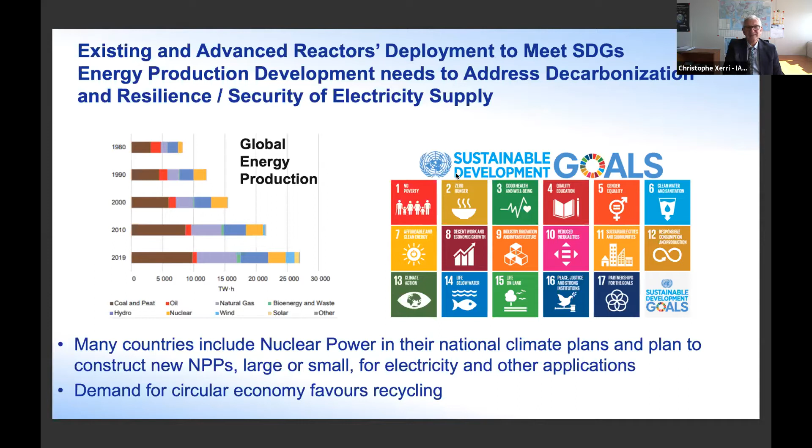So how do we foresee nuclear power beyond 2050? I said beyond 2050 because before that, basically all of us already know what is ongoing. If you take a long-term view, the current majority of reactors are based on designs developed in the 80s and 90s, which have been improved over time, with the leading technology currently being the light water reactor, whether pressurized, boiling, or VVER.

There are also other technologies being implemented, like the Canadian CANDU reactors, for instance, but light water reactors are clearly dominating the scene, with sizes that started at 400 to 600 in the 70s, now being close to 1,000 up to 1,500.

Future systems are coming, and what we see is, of course, still a good contribution from light water reactor technologies, including big reactors, which are here to stay. But in addition, we see SMRs, small and modular reactors, coming with specific designs, sometimes similar to light water reactors, but sometimes very different. We expect that with nuclear energy here to stay, recycling will become more widespread, which means fast reactors will also have their role to play.

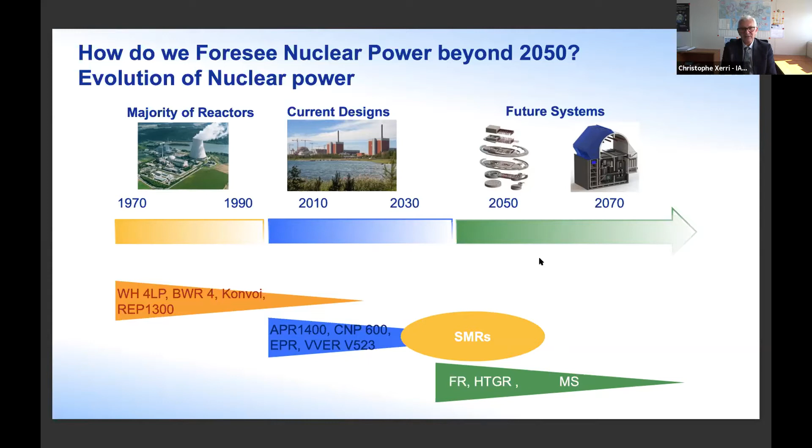Which means that because implementation of a nuclear power program takes many decades—and here we were discussing the design—but once you've got it, your reactor will usually run for 60 to 80 years, maybe even more in the future. There are many pathways and many unknowns, so we'll not go into details, but just give you a glimpse.

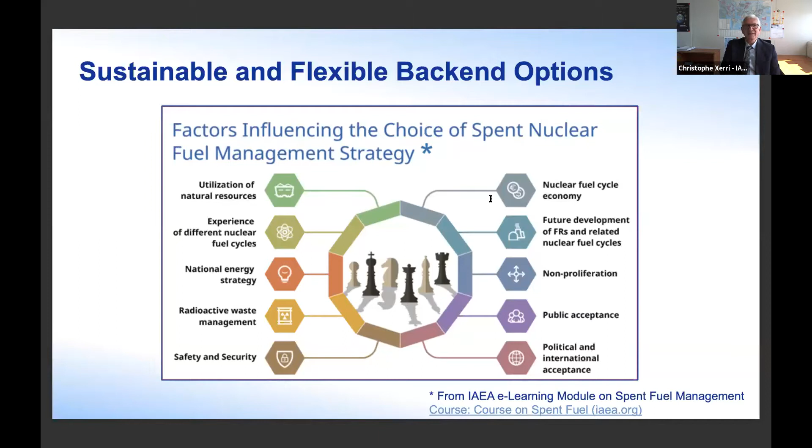And with Gen 4 reactors, we could go to a fully closed cycle. And if you take a very long-term view, maybe at some point we will be able to no longer use any uranium and run mainly on recycling of current and future spent fuel. All that with thinking of economic viability and safety, environmental friendliness and waste burden minimization, proliferation resistance, and flexibility to adapt to any policy evolutions.

So as you can see, the pathways are many, and it's very difficult today to know what the real situation will be in 10, 30, 40, or 50 years' time. Next one, please.

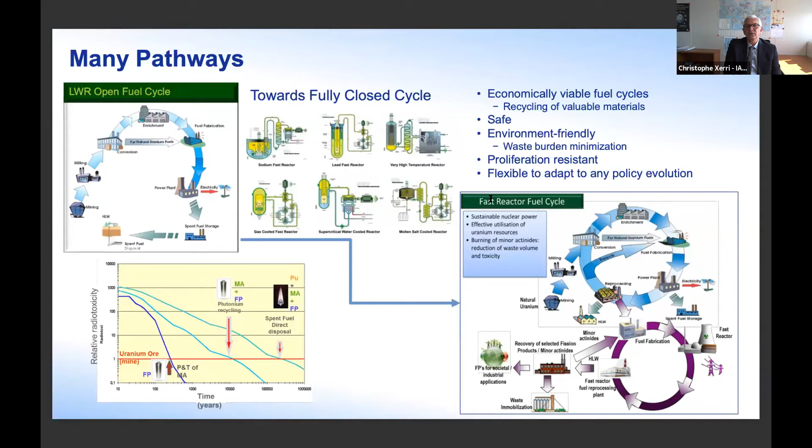Which means as well many unknowns. So on the storage itself and the technologies, location and duration, we started with 40, 50 years in mind. We are now close to 100, and it may be more. What the endpoint will be: direct disposal, recycling, which type of recycling, mono-recycling, multi-recycling, evolution of nuclear energy demand.

Today we saw that growing, but growing moderately compared to the needs of the planet. Maybe there will be a strong acceleration because there will be no other options, or maybe there will be a big breakthrough in nuclear fusion, and it will be a different way of thinking, and new technologies, which all will result in impact on spent nuclear fuel management in the future. So again, nobody knows, but it is important that these uncertainties, but also these opportunities, are identified, recognized, and addressed.

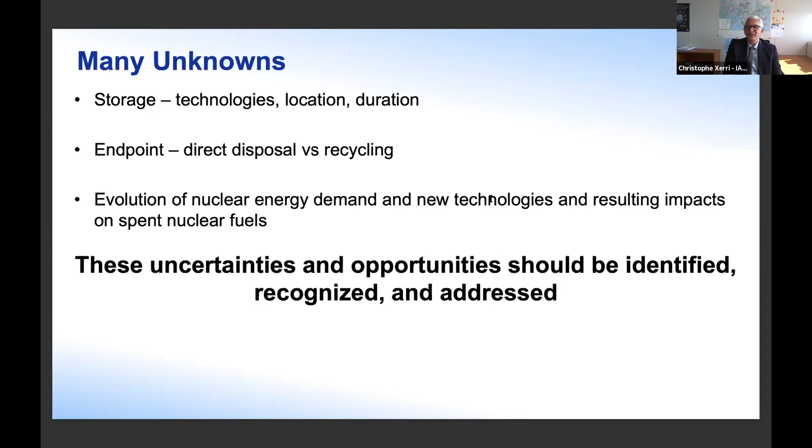I'm talking about opportunities, just quoting a side discussion I had some years ago with a country which is currently storing its spent fuel and was looking at several pathways for their future strategy. And one of them is, shall I take over the spent fuel of other countries? Because in 40 years' time, everybody will want spent nuclear fuel for fast reactors and I will be very rich at that time. So it's also an opportunity. Next one, please.

So in any case, storage is a key step of spent fuel management strategies. As you will see from Finland, between considering final disposal and having it implemented, it takes decades. Same with recycling. Some countries are basically recycling nearly just in time. But if you have not started to recycle, it will also take time.

And if you are waiting for opportunities to do that, the time you need to have either your geological disposal or your industrial recycling facilities, with the current economics of uranium, we are talking about decades. So whatever you think you will do, or whatever you want to do now, you will need spent nuclear fuel storage solutions. Next one, please.

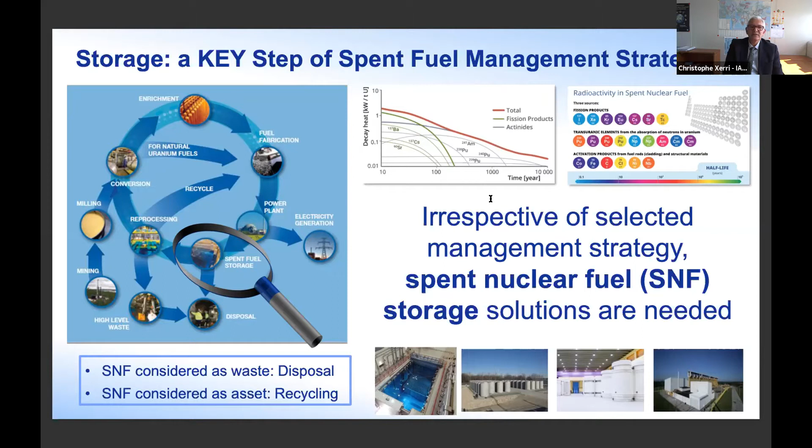So that's where we look at duration. Clearly, long-term storage is not an alternative to recycling or disposal. It's an interim solution. And I put here the definition we find in the safety glossary. Storage is a temporary step by definition: spent fuel is held in a facility that provides for its containment with the intention of retrieval, whether it is for disposal or for recycling.

But it does provide flexibility: new technologies, new recycling options, socio-political demands, which, as we said, could change in the future, public support. Now, recognizing that storage duration is an opportunity or something that you have to deal with, there are some topics to be addressed. One is the spent fuel behavior and integrity in long-term storage. Another one is the aging and maintenance of the storage facilities themselves. And another one, as an example, is spent fuel transportability after storage. Next one, please.

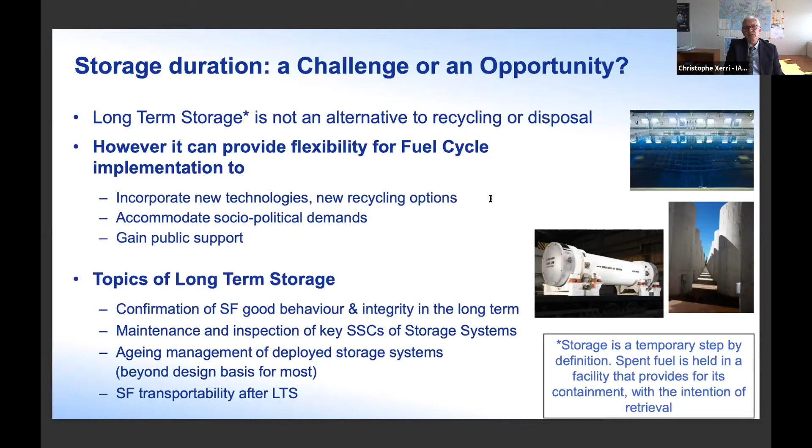So the agency has coordinated a lot of work on all these topics. Here you see a series of what we call coordinated research projects on the behavior of spent fuel assemblies during storage. And we have consolidated the results obtained since 1981 in a new TECDOC, which is being published. Next one, please.

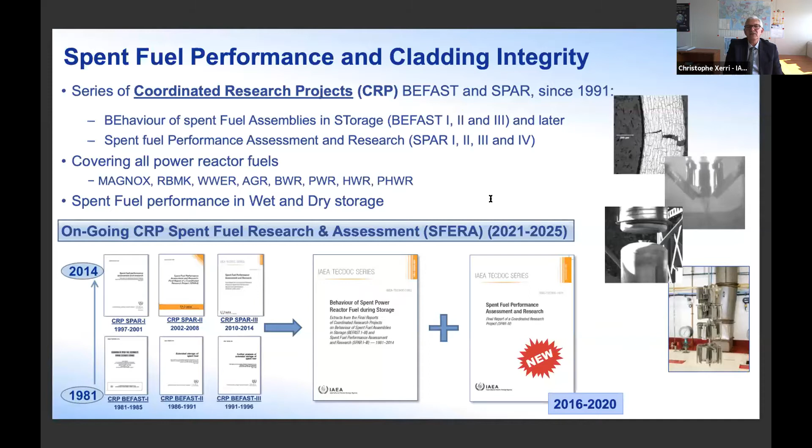We have worked on spent fuel performance and cladding integrity. And as you can see, this work is very detailed, based on more than 60 years of storage experience in wet conditions, mainly at reactors but also sometimes at centralized facilities, and the more recent, but still more than 40 years, experience in dry storage. And one of the topics looked at here was the effect of hydrogen on zirconium cladding. Next one, please.

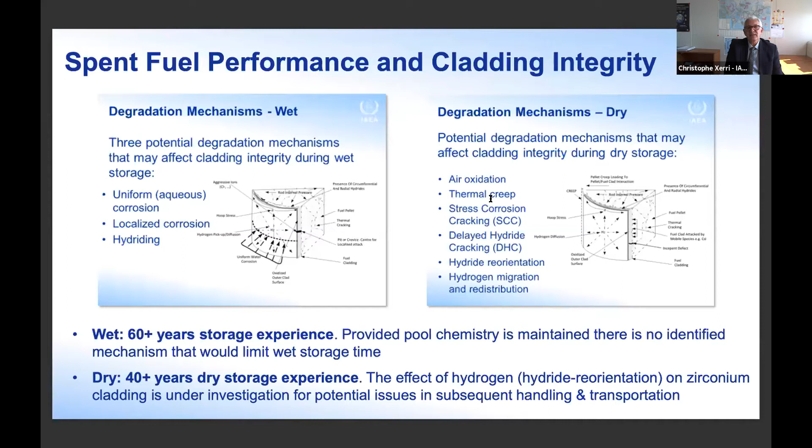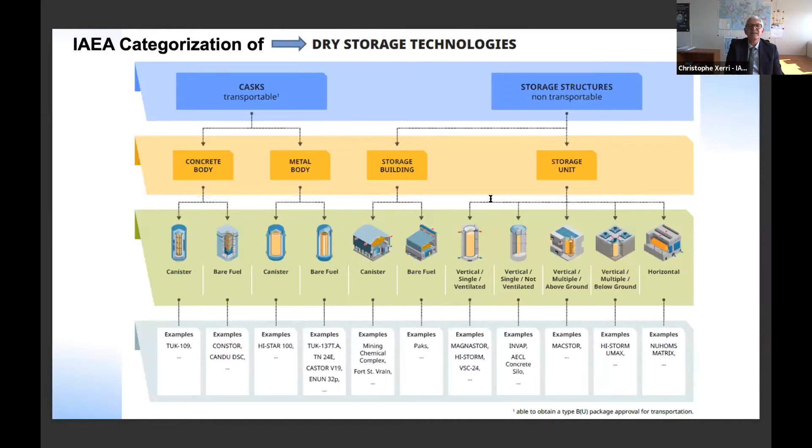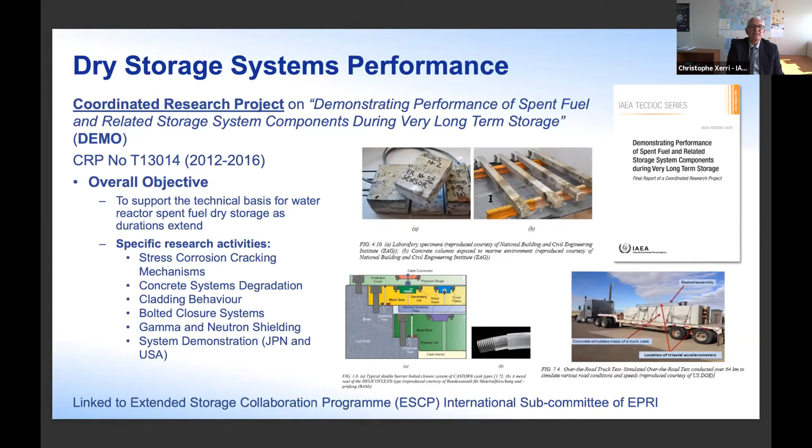So we are working also on dry storage systems performance with a coordinated research project on demonstrating performance of spent fuel, which we called DEMO, which is coming to an end. And we will have, next one, please, a new one coming. Yes, on aging management programs for dry storage systems, which also came to an end, and we are publishing a TECDOC, technical documentation, on it, and we are starting a new CRP on spent fuel storage systems, which will be launched next year. Next one, please.

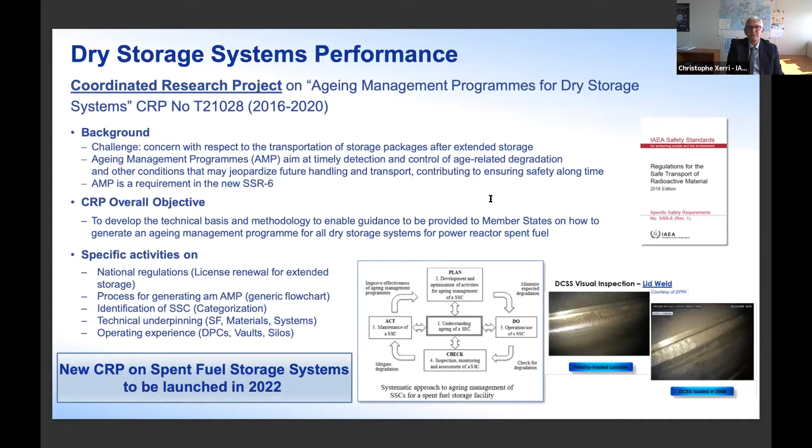And on spent fuel characterization, which is important, especially when we're talking about long lead times. If you are not exactly sure of what you will do next, you need to have the proper information to transfer to the next generation. And on that also, we are launching a new CRP on options to enhance nuclear energy sustainability, going beyond the characterization itself. That will be launched also next year.

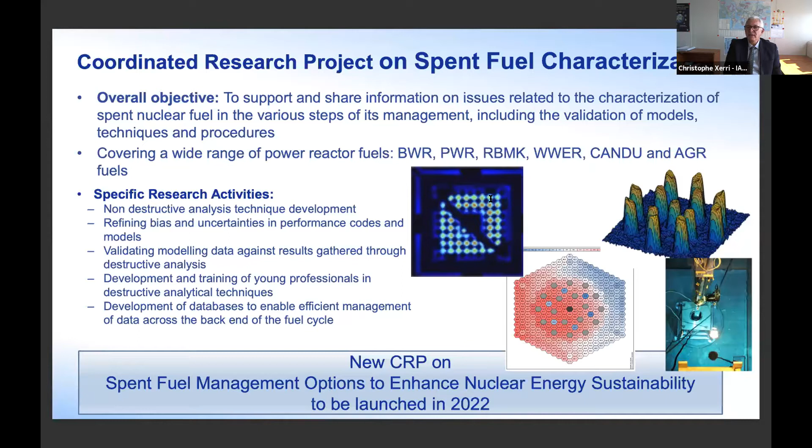All these coordinated research programs will be announced on the agency website, and all organizations in the world can decide to join us in this joint research effort. Next.

Apart from that, we have other collaborative projects which are looking at spent fuel under INPRO, the Innovative Nuclear Reactors and Fuel Cycles cooperative approach to the back end of the nuclear fuel cycle, looking at the drivers, whether there are institutional, economic, and legal opportunities and impediments, and so on, a publication working on that, and also waste from innovative types of reactors and fuel cycles.

It's important when we are developing new technologies that we think about the spent fuel management of this new technology. Chromium cladding will not behave and be handled the same way as the current zirconium cladding, for instance. And when we're talking about molten salt reactors, it's a whole new field which needs to be discussed and researched. Next one, please.

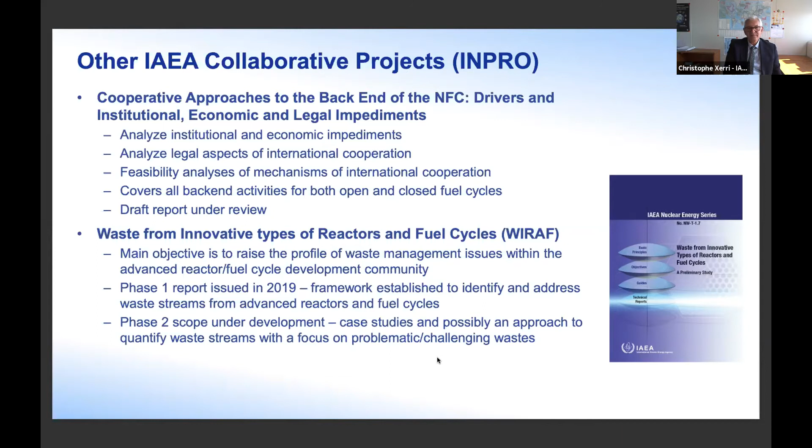So basically, as a conclusion, ensuring flexibility provides opportunities for any anticipated or innovative future solution. Storage for long periods contributes to flexibility, and we have already done a lot of research which gives us a good level of confidence in the safety and sustainability of extended periods when necessary. As I said again, some countries are recycling just in time and are happy with it.

And flexibility should not be seen as wait and see. Wait and see is something like I do nothing and I think of nothing. That is not sustainable and that is not a good policy. Now, having a policy that you reassess from time to time and remaining flexible in terms of adapting to what the new realities will be is a proactive and a very positive approach.

And that's what we're encouraging those countries, especially those countries who are starting nuclear programs now, to have a proactive approach on spent fuel management and to reassess their policy on a regular basis, so that they can adjust to the new technologies and the new social expectations at that time, and in between benefit from the 60 years and more of experience on spent fuel storage, plus all the research done, which gives confidence that it is safe to do so.

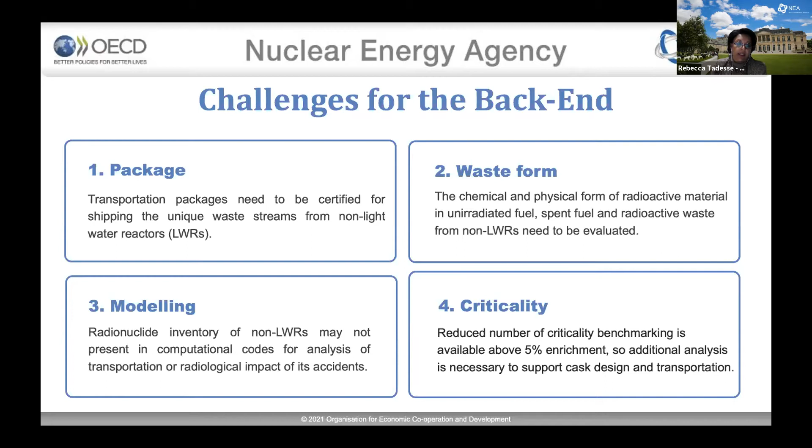And criticality is also an area we need to address. When we're looking at high enriched uranium as one of the elements we might use for advanced reactors, we need to make sure we have the data necessary to do benchmarking above 5%, and that the casks for transportation as well as spent fuel storage are capable of addressing criticality concerns. Next slide, please.

What are the anticipated regulatory challenges? Some of the things we've identified: for enrichment and fabrication facilities, most commercial facilities are designed and licensed for 5% enriched material. So there's a challenge that the regulator has to consider how to increase that, and the licensing process needs to be evaluated.

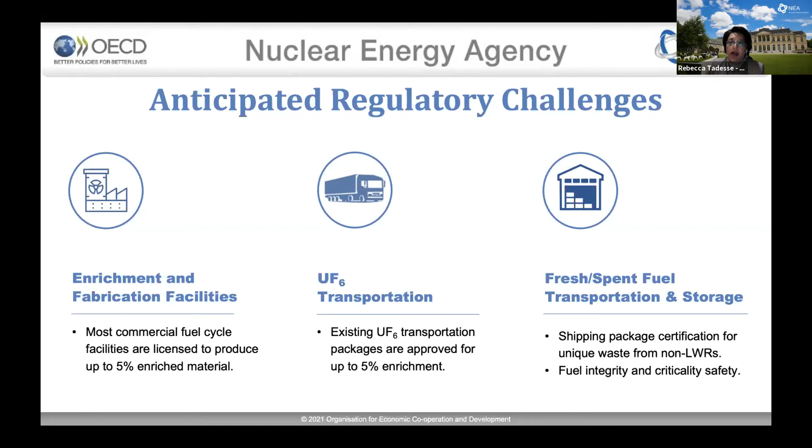Transportation is also an area that needs to be addressed from packaging when you're looking at high enriched, or when you're considering exotic materials. The fuels being considered for molten salt reactors and other reactors need to be evaluated to make sure the transportation packaging is still within the bounds. And for fresh and spent fuel transportation and storage, as I said before, we need to address issues with criticality, integrity of the fuel, and safety. Next slide, please.

What the Radioactive Waste Management Committee is doing is that we created an ad hoc group on extended storage of radioactive waste and spent fuel. The objective of this ad hoc group is to look at current activities, and whether there are any gaps that need to be addressed to deal with new types of spent fuel generated through high burnup, other management issues in new fuels, aging issues, and transportation readiness for both fresh and used fuel in the future.

We also looked at consideration of existing codes and standards to predict radioactive waste and spent fuel evolution for long-term storage, identifying tools required for extended storage periods, and any transportation issues in radioactive waste and spent fuel. This ad hoc group was given the responsibility to look at the gaps for 1 year, and then it goes back to the committee to determine what further activities will take place. Next slide, please.

We also thought it's important to consider the role of waste management and decommissioning in advanced reactor design and licensing, as well as fuel. So we are planning an NEA and NRCan workshop in Ontario, Canada. The dates have not been determined yet due to COVID. This is really to bring the designers, operators, implementers, and waste people together to understand the issues to be addressed from the design perspective for radioactive waste management and decommissioning, so that we take the lessons learned from existing sites and activities, learn from them and improve them.

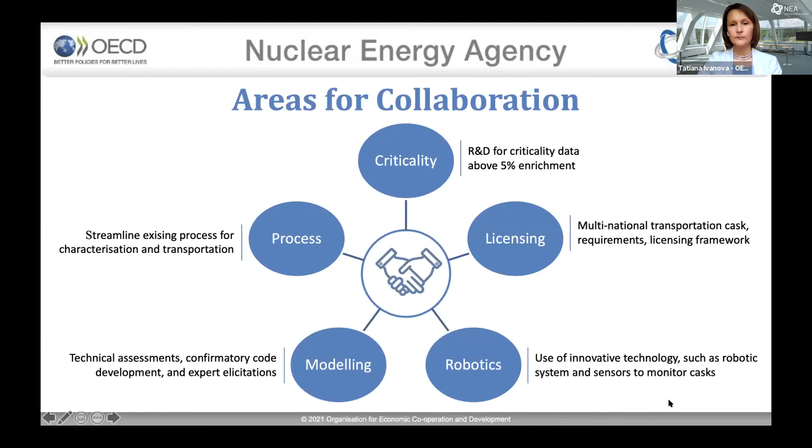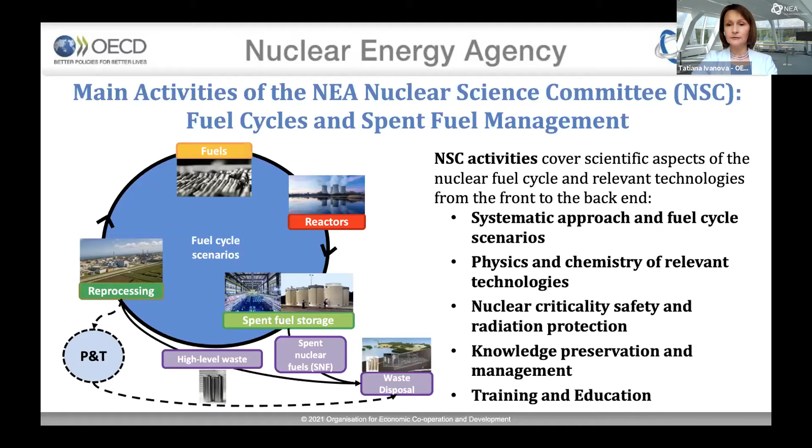Some of the NEA initiatives that Rebecca has already mentioned, I'll briefly present now, and I would like you to change the slide, please.

The fuel cycle scenarios is one of the activities under the umbrella of the Nuclear Science Committee. A recent initiative, a task force on demonstration of fuel cycle closure, including partitioning and transmutation for industrial readiness by 2050, was launched in January this year.

This initiative brings together high-level experts from several countries who meet regularly to produce high-level reports that will tackle technological, economic, and societal aspects of advanced fuel cycle and partitioning transmutation options.

This report will provide recommendations on how these technologies can reach industrial maturity by 2050, and it will also recommend practical steps towards experimental demonstration of the feasibility of the closure of the fuel cycle.

Also, I'm very pleased to announce here that the NEA, jointly with our members, is going to co-organize the International Exchange Meeting on actinide and fission product partitioning and transmutation.

The next event, the 16th IEMPT, co-organized by Rosatom, will be held in June next year in St. Petersburg. We thank our Rosatom partners and invite you to attend this meeting and be part of the discussion on state-of-the-art developments in this area.

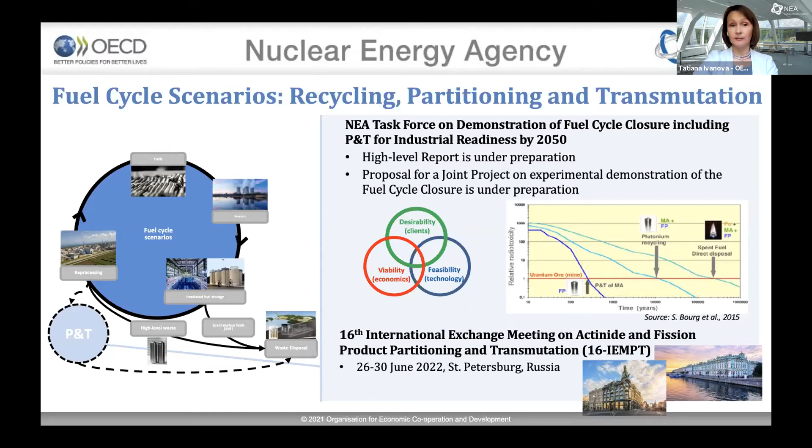Next, another topic I would like to present is the separation processes relevant for spent fuel, nuclear fuel reprocessing, waste treatment, recycling, and reuse of spent fuel components.

Current activities in this area encompass a report on treatment of volatile fission products and a new database on extractants for spent fuel reprocessing. You can also see the publications that have been produced by our group in this area. Next slide, please.

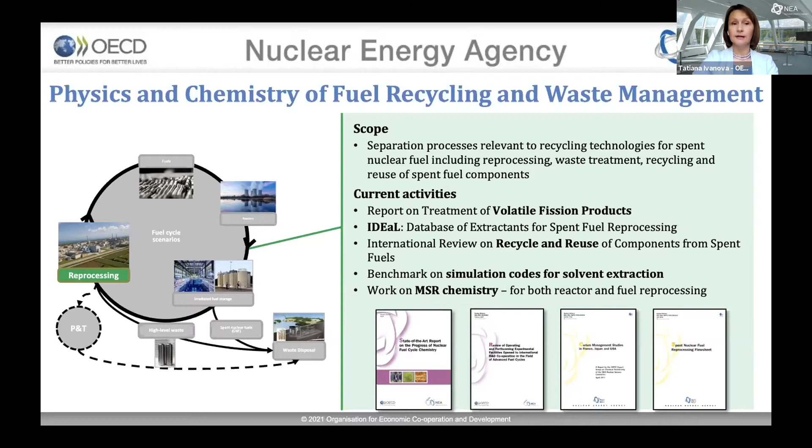And of course, nuclear science tackles fundamental aspects related to radioactive waste management and storage. Starting from fundamental aspects, we have a collection of thermodynamic models and data, along with joint projects and regular nuclear science activities.

We have a broad range of nuclear data topics covered by our working parties and expert groups. We also work on nuclear criticality safety, where our work includes modeling and simulation, benchmarking, validation, and uncertainty quantification.

One of the major outputs in this area of nuclear science is the Handbook of the International Criticality Safety Benchmark Evaluation Project, or ICSBEP project.

This is the world's largest collection of internationally peer-reviewed critical benchmarks that are widely used for criticality safety assessment of fuel cycle facilities, including transport and storage.

Currently, the database contains over 5,000 benchmarks of critical, near-critical, or subcritical configurations collected since 1995.

There are several configurations with over 5% enrichment, as mentioned by Rebecca and required by our practitioners.

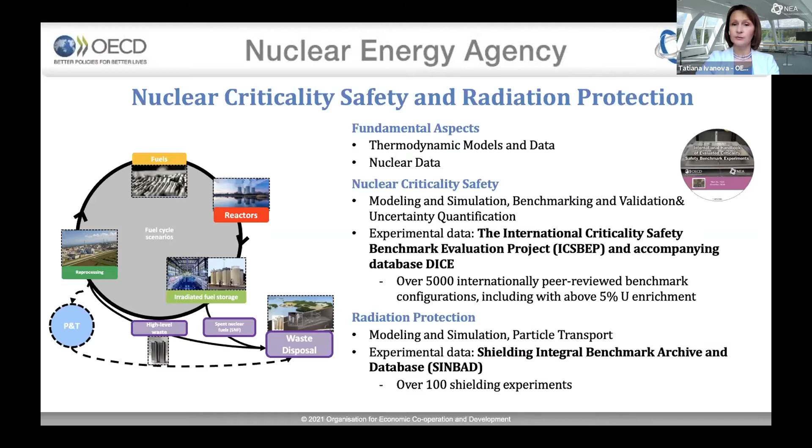It is compiling high-quality experiments for validation and benchmarking of computer codes and nuclear data used for radiation transport and shielding problems. Next slide.

Thank you. Another very important area, also mentioned by Rebecca, is characterization of spent nuclear fuel. We have a spent fuel isotopic composition database, so-called SF-COMPO, that contains the world's largest collection of experimental assays of spent nuclear fuels.

The measurements in SF-COMPO are isotopic concentrations from destructive radiochemical analysis of spent nuclear fuel samples.

These are supplemented with design information of the fuel assembly and fuel rods, as well as relevant information on operating conditions and characteristics of host reactors.

The data in SF-COMPO comes from 750 spent nuclear fuel samples irradiated in 44 power reactors, which have been experimentally measured in the past 50 years.

In addition to this, we have recently launched a new benchmark on calorimetric measurements of spent nuclear fuel assemblies, and we are working on this together with a Radioactive Waste Management Committee.

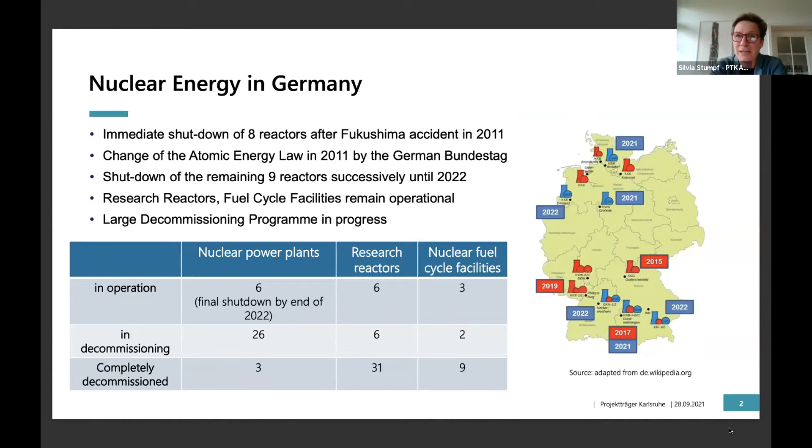So what is the situation in Germany? On the basis of the working results of the German Repository Commission, it was decided to have an amendment of the Site Selection Act. So it was defined that one has to define new exclusion criteria, new minimum requirements, and weighing criteria. This new Site Selection Act came into force in 2014.

In connection with this Site Selection Act, there was a restructuring of responsibilities, the political responsibility and the implementing responsibility in Germany. And what is even more important, Germany went back to a blank map. So there was a reset and a start from zero when it comes to finding the right site in Germany. We have a blank geographic map at the moment.

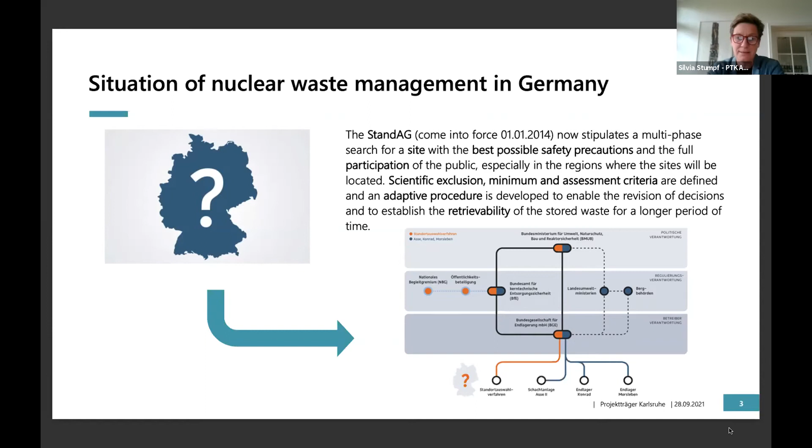In order to select the right site, it was decided to have a three-step selection process. In step one, which is what we are in right now, that is the determination of sub-areas. The first interim report with proposed areas was already published at the end of last year, 2020. On the basis of this interim report, the Bundestag will decide on the regions to be explored in steps 2 and 3: step 2 being the surface exploration, step 3 the underground exploration, and the whole exploration process will end in 2031.

With this, Germany is going to start the construction of the repository until 2050, and with this, also the implementation as of 2050. And of course, this will have an influence on our interim storage, since the timetable is much enlarged. Next slide, please.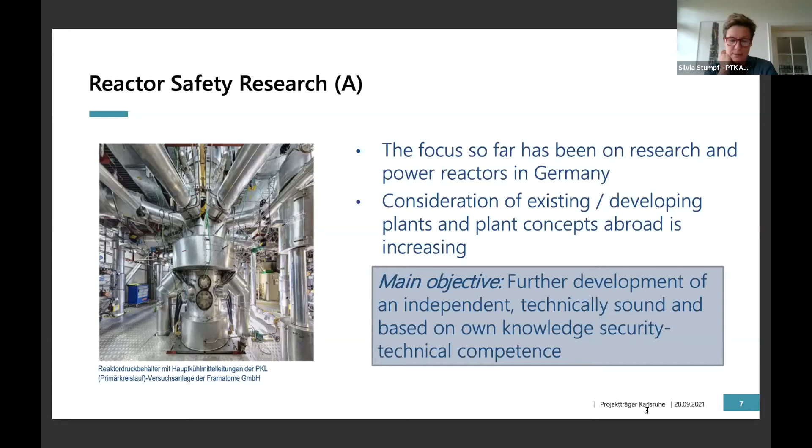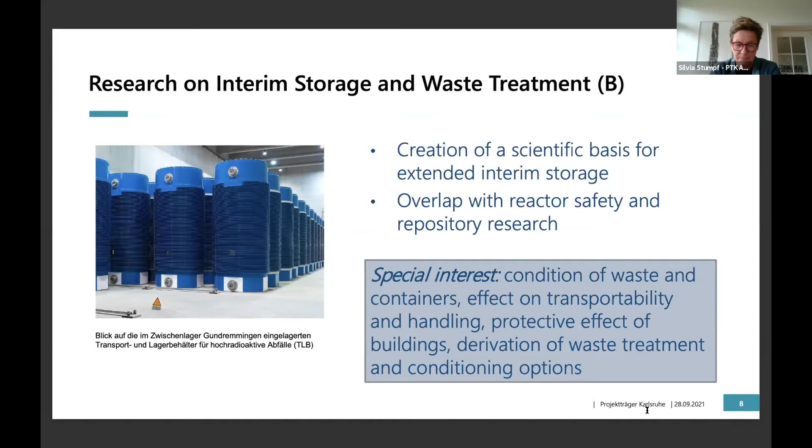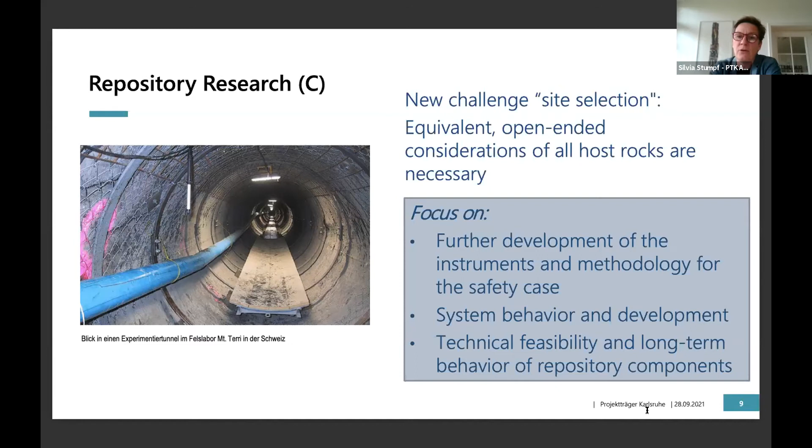Repository research, in the context of the new challenge of site selection, requires an equivalent open-ended consideration of all host rocks, such as salt, crystalline, and clay, since we start from a white map again. The focus is on the development of instruments and methodology for the safety case, system behavior and development, and the technical feasibility and long-term behavior of repository components.

When we talk about the future of spent fuel management, one perspective to look at is the perspective of research. This research approach is divided into three main pillars: first, applied fundamental research, classical experimental work in laboratories and modeling of experimental data. But we are also performing practical validation and application, so safety assessment and technical demonstration, working in underground research labs. As a third pillar, you have education and training in order to build and maintain technical and scientific expertise.

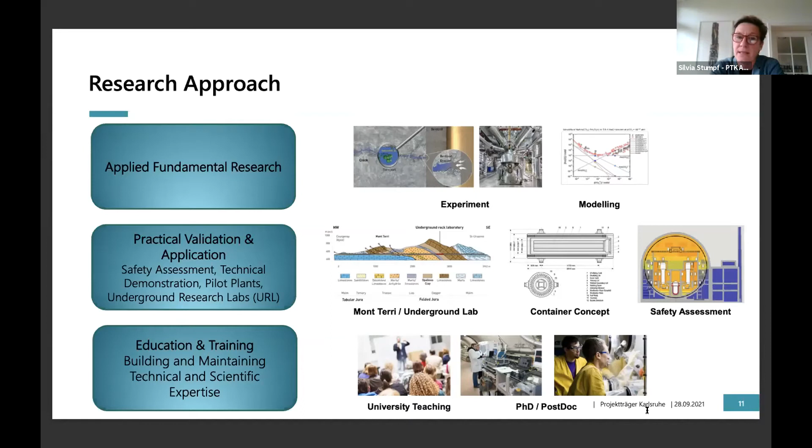Beside the perspective of research, one could also change the perspective and look at the management idea by developing competence in young academics. It's very important to have qualified staff to perform research for reactor safety and interim storage, etc. But moreover, it's very important to have the preservation and expansion of specialists' knowledge. So knowledge management is also something very important, which we definitely realize in Germany.

I guess Mrs. Ivanova was also talking about that, and I personally see a great overlap, that knowledge management, training, education, and basic knowledge in physics and chemistry is something Germany is also aware of in order to have a future in spent fuel management. But beside that, international networking is of overarching importance.

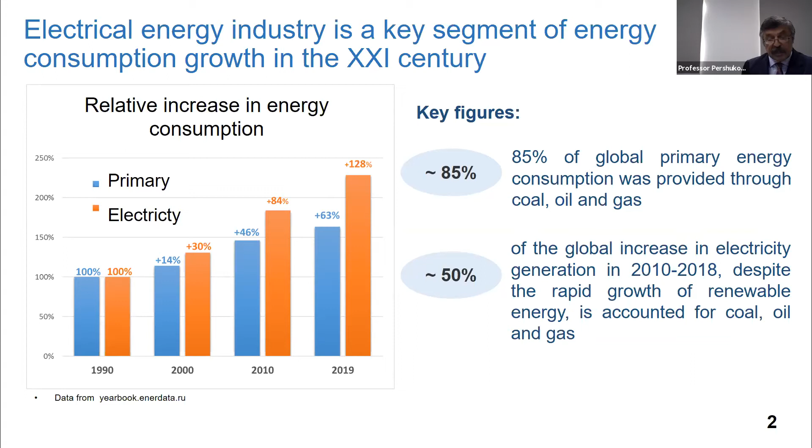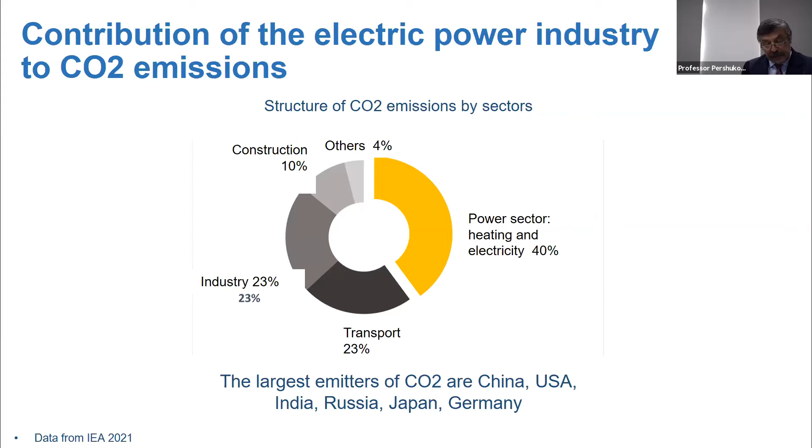About CO2 emissions and decarbonization. According to the latest data from the International Energy Agency, the electricity and heating sector accounts for approximately 40% of carbon dioxide emissions. The task of decarbonizing this sector of the economy is key to the global agenda for climate regulation and sustainable development. Russia is one of the largest emitters of carbon dioxide, ranking fourth after China, the United States, and India. In the address to the Federal Assembly in April this year, our president announced that we must respond to the challenges of climate change, outlining the target points.

The general structure of power generation: Germany has actively developed renewable energy. This led to an increase in the cost of electricity and made production dependent on weather conditions, but the problem of emissions has not yet been solved. France generates 70% of its power from nuclear, and the price of electricity is approximately two times cheaper than in Germany. In Russia, we now have 19% nuclear power generation across the whole territory, and approximately 40% if we're talking about the European part of the Russian Federation. Our price is only 5 euro cents per kilowatt hour. These factors should be accounted for when preparing responses to the challenges of climate change.

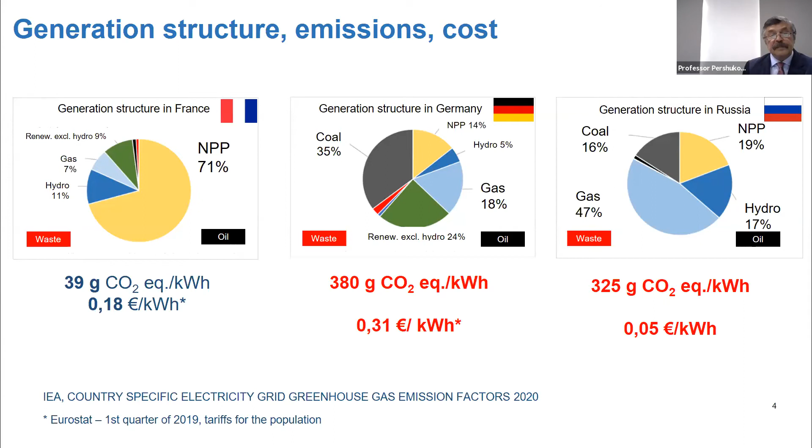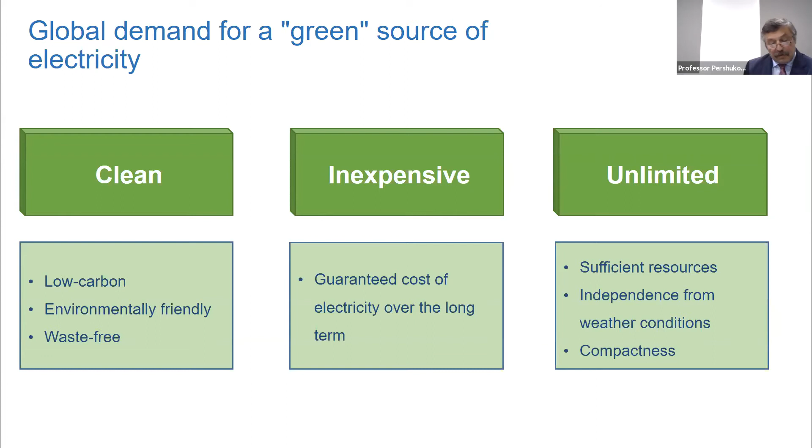What does it mean for us, for our understanding, to have a green source of electricity? The global demand for a green source of electricity can be briefly described in three words: clean, inexpensive, and unlimited. Of course, I'm not talking about safety, because for nuclear power, safety is the foundation. We can't discuss any technical solution unless it can provide a very, very low probability of accidents.

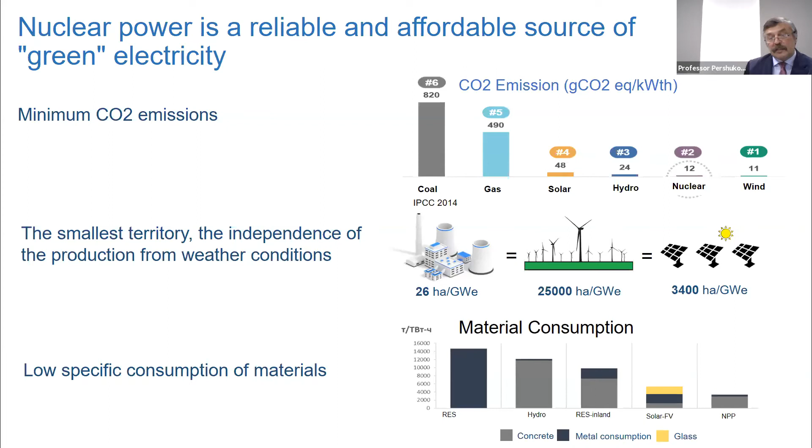We've discussed a lot about the general characteristics of nuclear power and how we see it on the global maps of power generation. At minimum CO2 emissions, nuclear is in 2nd place among all types of power generation technology. Second, it uses the smallest territory and depends less on production from weather conditions—there's a comparison of nuclear energy with wind and solar. We also make comparisons with low specific consumption of materials, and we see that NPPs, due to their very high energy potential in a small volume, also have very good material consumption characteristics during construction.

Nuclear power achieves full compliance with the requirements for a clean, inexpensive, and unlimited source of electricity only when moving to a closed nuclear fuel cycle, which solves the issues of sufficiency of resources, near zero waste, and absolute environmental safety. This position is a basic principle when we consider the breakthrough project, and we try to input these basic principles in the realization of our project.

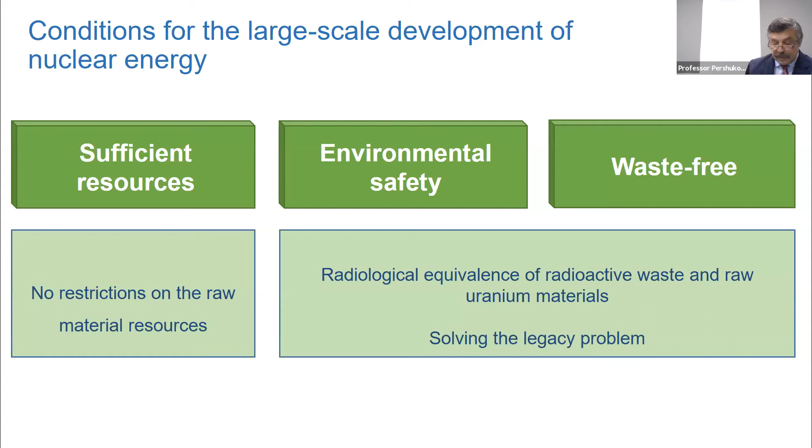In raw material terms, you know that open cycle uses only 0.7% of uranium resources involved in power generation. In closed cycle, it will be 86%. The closed fuel cycle introduction of such technology increases the efficiency of the use of natural uranium by 150 times, where the share of world energy resources increases by 86%.

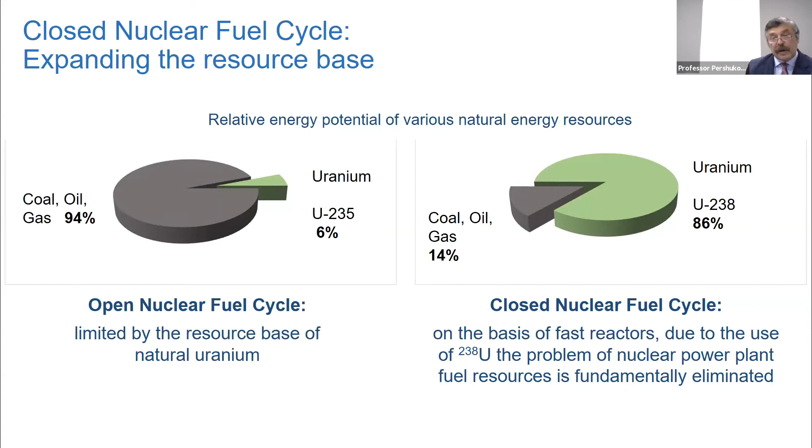Second, the biggest problem of open fuel cycle and waste management in nuclear power generation as a whole is the problem of radiological equivalence and radiation equivalence. If we are working in open nuclear fuel cycle, it will be near 700,000 years. If we are working in closed nuclear fuel cycle, it's just 100 years.

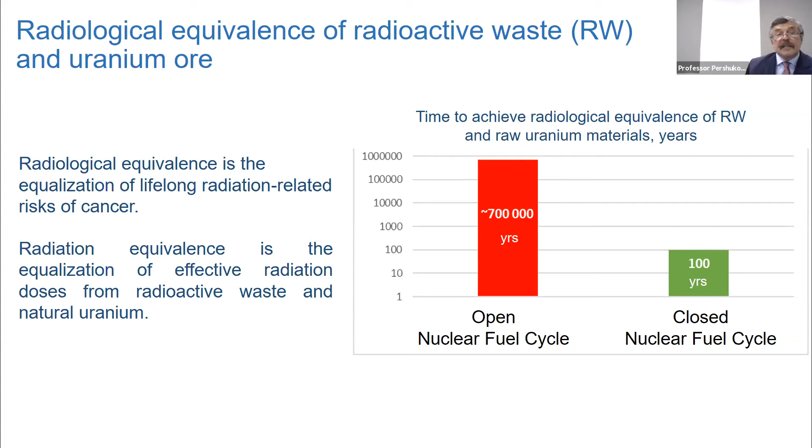Can we solve the problem of nuclear power and spent fuel if we are working in open nuclear fuel cycle? Unfortunately not. During the period from 2015 to 2040, we will twice increase spent nuclear fuel accumulation. It means that without a decision on reduction of storage of spent nuclear fuel, it's impossible to include nuclear power plants in green energy.

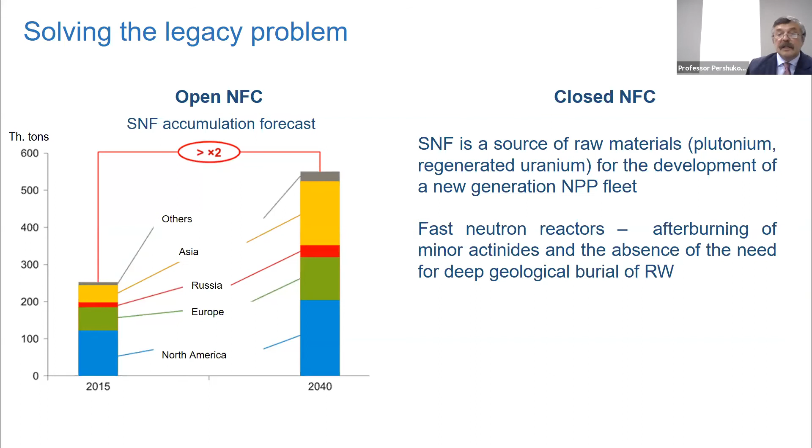What's the way? What do we need to do? Of course, there was a lot of discussion, not now but maybe 50 years ago, about the closed nuclear fuel cycle, with clear understanding that it's a way not only for green energy, but also for human health and social problems. But when we create the breakthrough project, the general idea is a closed nuclear cycle combined with the fast reactor, because without the fast reactor it's impossible to close the fuel cycle. This project included the use of the fast reactor for reproduction of the fuel base and ecological safety.

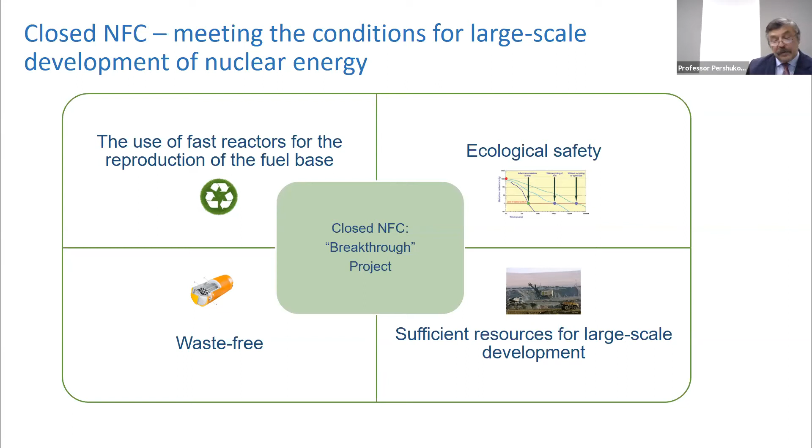This picture we see in each presentation. It's very good - waste-free, in general. Of course, we have some problem with natural radioactivity that we input into the fuel cycle from the land during the production of uranium. And sufficient resources for large-scale development - it's the basic principle that we input into the breakthrough project, and now we are realizing it.

This project will start approximately in 2011, 2012. From 2015, we start construction of the first plant or first model of this pilot demonstration energy complex. Now we are constructing it in the Tomsk region, and it's the fabrication facility.

In 2024, we will start manufacturing assemblies for primary loading in the BREST reactors.

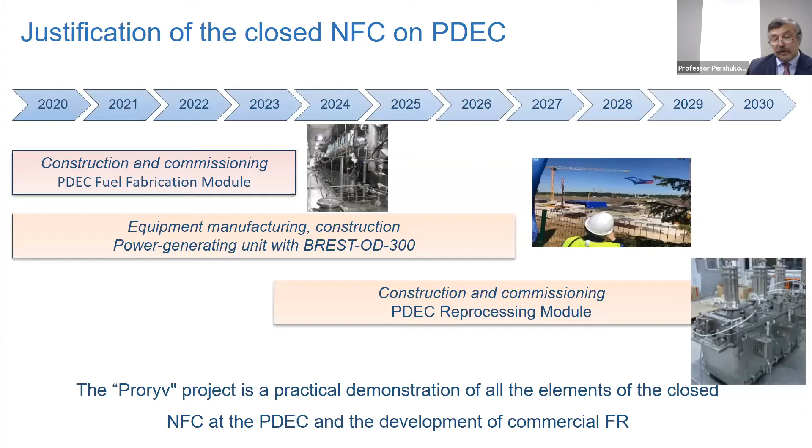We start construction in 2024, I hope, and need to complete before 2029. After that, the first irradiated pellets will be loaded into the reprocessing module, and we close the fuel cycle. By 2030, we complete construction of the pilot demonstration energy complex, and after that we will have proven technology for future commercial use.

Why? Where will we do it? Of course, we are going to understand that now from the simple process of changing the old generation, old light water reactors. After decommissioning, we need to construct some new ones, and we chose to consider using fast reactors for replacement in some power plants where reactors like VVER or RBMK must be decommissioned.

In 2045, we hope to construct a few commercial scale power units, and we will use a new technological platform. It means fast reactors or some special design like VVER-S for light water reactors with the possibility to use MOX fuel to produce electricity. By 2045, it's possible to ensure the large-scale introduction of fast neutron reactors with the closed nuclear fuel cycle, and the formation of a two-component nuclear power system in Russia will be completed.

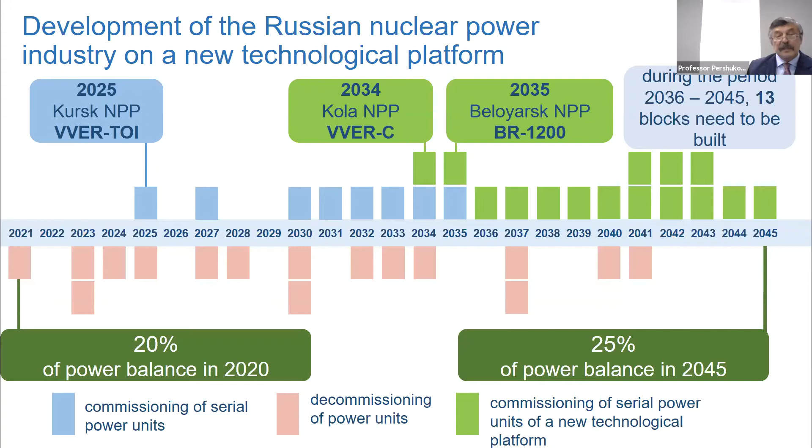Next, a few words. We are sure that the closed nuclear fuel cycle is the non-alternative way to bring the nuclear power sector into green energy generation. And also it will be a new technological platform, and this is a contribution to economic growth and improving well-being in Russian cities.

And so a few words: Breakthrough has come from a theoretical project, from an R&D project, to a really industrial scale project for demonstration of technology and science, under construction and operation, using the closed nuclear fuel cycle with fast reactors for the future. And so I hope before 2030 we can demonstrate the closed nuclear fuel cycle, with green energy status for nuclear power. Thank you very much.

Thank you, Mr. Pershukov, for this overview presentation of the Breakthrough, or Proryv, project. Now we look at another project presentation from another country. We will look at China, where we will hear from Dr. Liu Qiuchan. Liu Qiuchan is Director of the Division of Nuclear and Radiation at China National Nuclear Corporation. He will discuss China's nuclear power development and the significance of the back-end on that development, in the context of China's carbon peak and carbon neutrality goal. So, hello, Liu. The floor is yours.

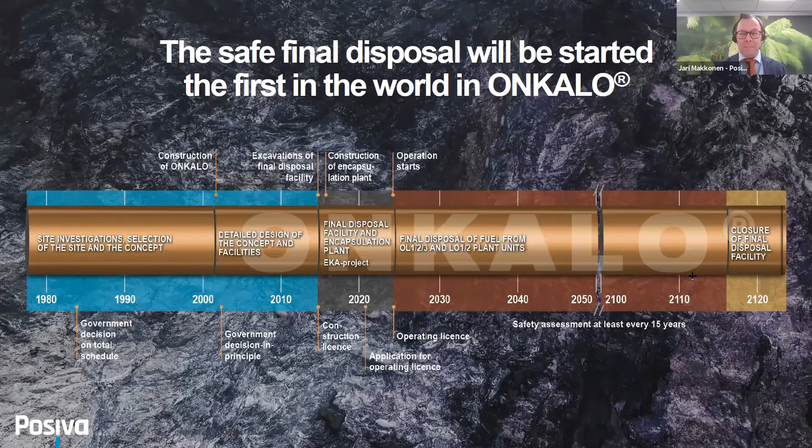But also, it's not only to complete a gigantic project from the Finnish perspective, but also for the entire world to communicate what we have been doing and how we have been doing this, what are our lessons learned, and what are the benefits that we can share for all the other nations who are using

nuclear energy. So during our years when we have been planning and constructing the facility, the important stakeholders have naturally been, of course, the government, which still changes every now and then, but still in the Finnish case, we have been very successful to keep this program alive all the time, even though the governments have been changing several times during the past 40 years. But still, there has been the commitment, regardless of every government in force, that we will continue with this program. It's so promising, and that's a very important thing.

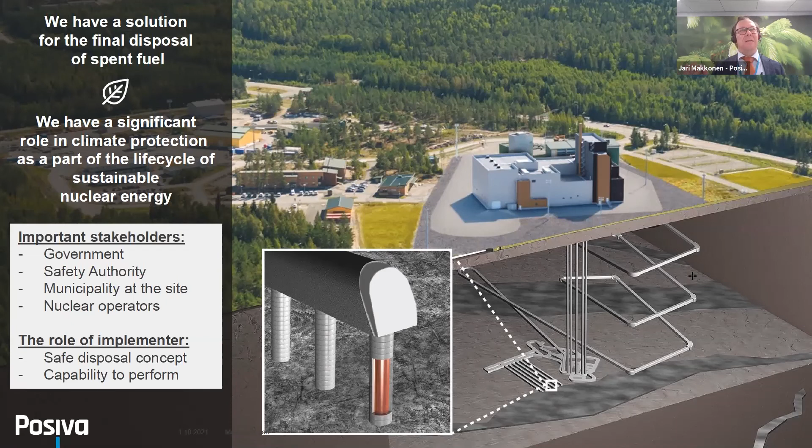And according to the surveys and the feedback that we have gotten over the years, the citizens respect that very much, that we don't try to hide anything, but we are open. We are basing our communication on true facts which are found by the scientific society. So that's very important to be remembered in every nation who is considering to advance DGR programs and final disposal programs: be engaged with your municipality all the time and strongly.

Next, please. So with this picture, just to shortly illustrate the Finnish deep geological repository, which is also very well known as Onkalo. Initially, it was an area where we naturally did a number of different types of tests, once we got to the disposal level over minus 400 meters. And now we have been continuing to construct the below ground area further. And right now we are actually finalizing the maintenance area there in Onkalo.

And just last May, we started to excavate the final disposal tunnels, 5 of them, which will be used in the final disposal phase. And things are, based on this, proceeding very nicely in the underground area. And you can also see on the left hand side of this picture other things which are under construction for the time being, and what is the size of the repository area for the time being. In the latter part of this presentation, I'm going to show you how it will look like after 100 years. But this is how things look like now.

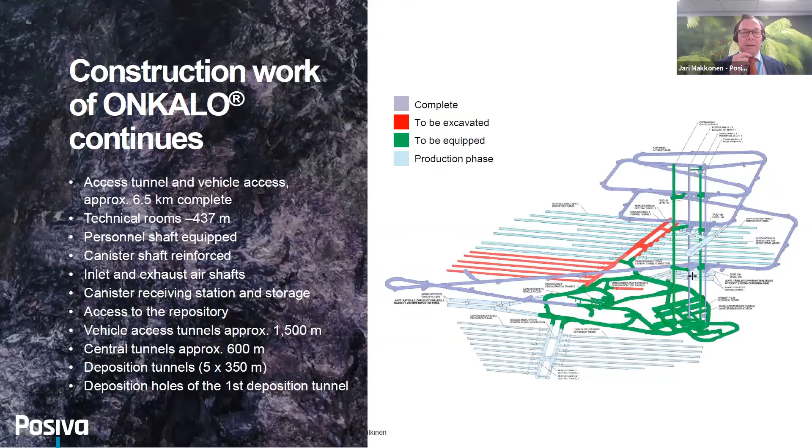Leading us to the next page, where I am now going to discuss more about this trial run of final disposal that will take place in only 2 years. And what does this trial run of final disposal mean in practice?

In this test, we are going to test the entire disposal process from interim storage through transporting a canister from interim storage to the encapsulation plant, then to manage the fuel rods, which in this test phase are yet going to be so-called dummy fuel rods, not true concrete waste. But we are going to still manage those rods in the encapsulation plant as they would be true ones, and encapsulate them into the copper canister, then lift the copper canister down to the repository area, manage those there with our special vehicle, which will then transport the copper canister to the disposal tunnel and to the final disposal shaft. And as the entire tunnel is filled, we will then fill it and close that with a plug.

So that is what the trial run of the final disposal system test is all about. Without having true concrete waste, we are going to test the entire process, how that will function.

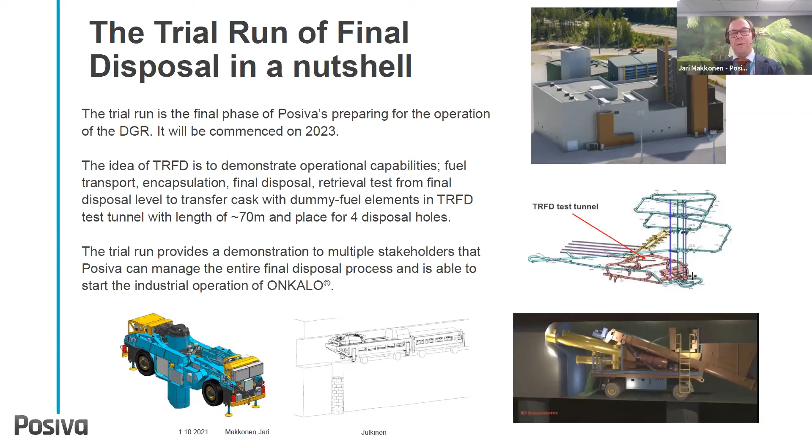As a final word, we now also have an opportunity for all waste management organizations in the entire world to participate in this test in a couple of years, and in a very close range to have a unique opportunity to look, see, and learn how things are functioning here in Finland, a great opportunity to interact with our subject matter experts and discuss how things are planned to be operated, and by doing so to learn and take those learnings to your own home country to benefit your own programs.

As I mentioned earlier, this is how our facility and the repository area will look according to our current plan in 100 years, meaning that all the high-level radioactive waste will have been disposed from our current 4 nuclear power plants, and in addition, the 5th one, Olkiluoto 3, which will be commenced to the network early next year. So after 100 years, all the rad waste has been disposed to our facility.

As a final word, we were very honored to host one very unique visitor, I believe many of us know him, the Director General of IAEA, Mr. Grossi, who visited our Onkalo premises last November. And just consider how excited he was — he was almost like a kid in a toy store when he was there underground.

As we know, he's quite active on social media, and he was continuously tweeting, because we do have Wi-Fi down there. So he was on a continuous basis tweeting how beautiful and magnificent this is, but also saying directly that Posiva's Onkalo is a true game changer. Everything that has been planned over recent decades globally is now going to materialize into a true concrete final disposal facility, which has been constructed according to all the safety standards agreed globally by the scientific community.